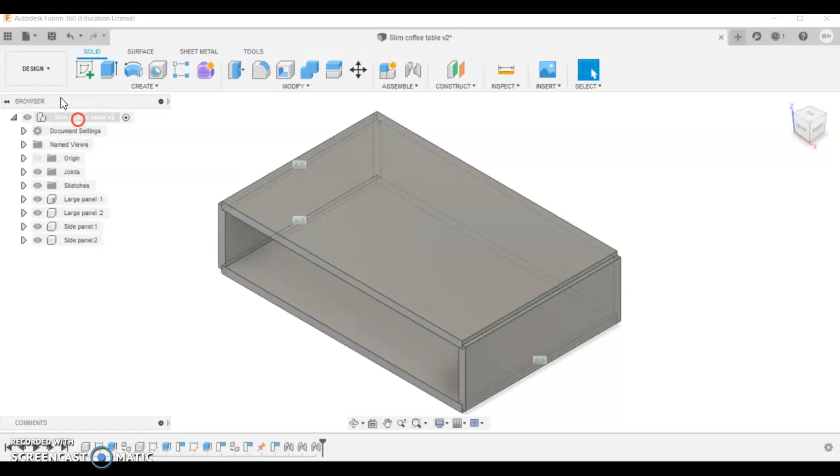Before I start a new sketch, I want to create a new component. The new component will come up in the list there in our feature tree, and we're going to call this one corner strip. Just make sure you get your naming right, because if you don't name your components correctly here, we can change it, but it's a bit of work later.

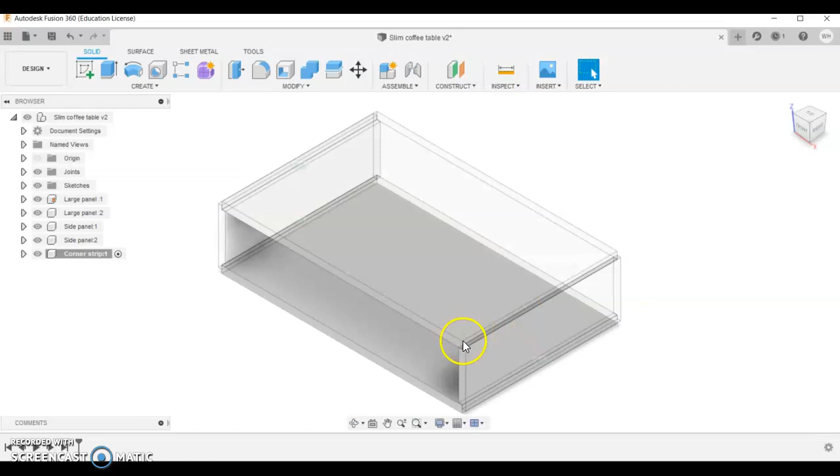So it's appeared down here. It's activated with a little bullet point there. I've already measured this, so we'll see if we can measure it now. Inspect, we'll zoom right in on this, and click this point here to this point here. It's 8.5 millimeters. I know it's already 8.5 millimeters from here to here as well.

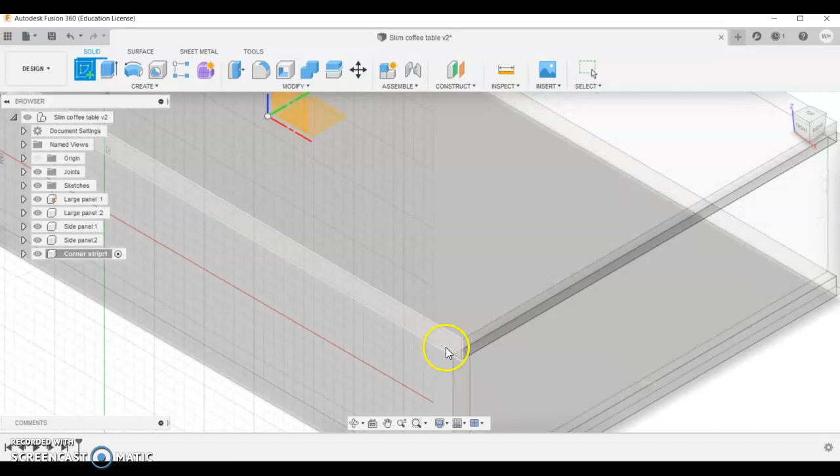So we need to start with a sketch. We'll click the sketch button. You can either draw it in context by selecting one of these pieces, but what I'm going to do is select up here, if it will allow me to select it. That's not the surface I wanted, so I'll start again. I don't have a mouse tonight when I'm doing this video, so it's a bit awkward to move around.

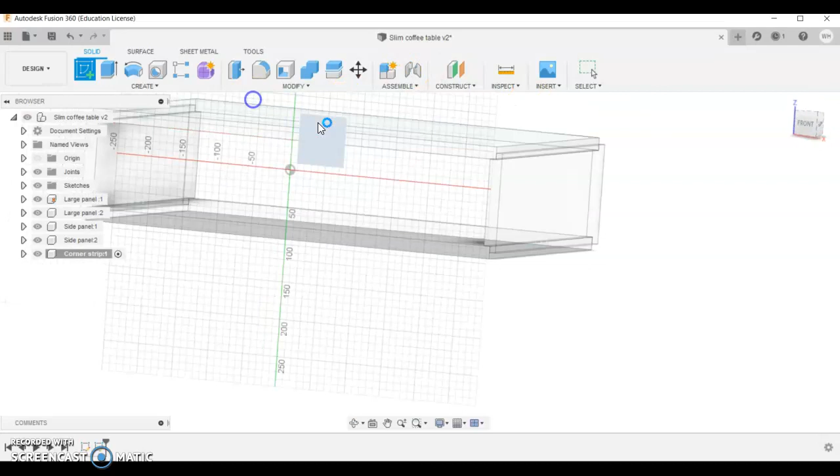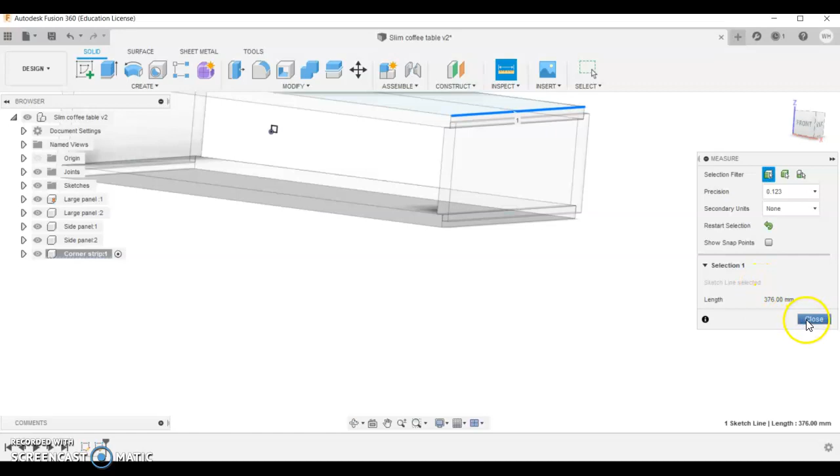So I've just started that. So it's an 8.5 by 8.5, so 8.5, tab 8.5, enter, finish the sketch. We're going to measure the length of the material. It's 376 millimeters. So extrude, and extrude that

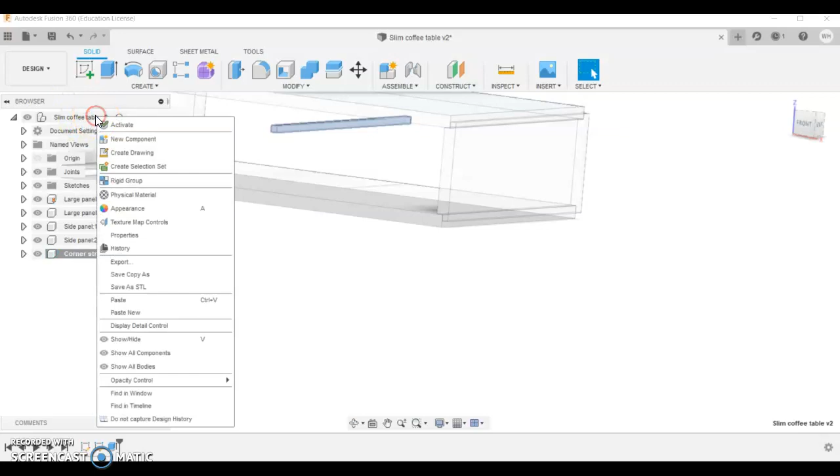376 millimeters. Press enter, and now what we can do is we can duplicate that component. So we're going to copy it by right-clicking and copy, and then up to the slim coffee table main part or the parent part, and we're going to go paste.

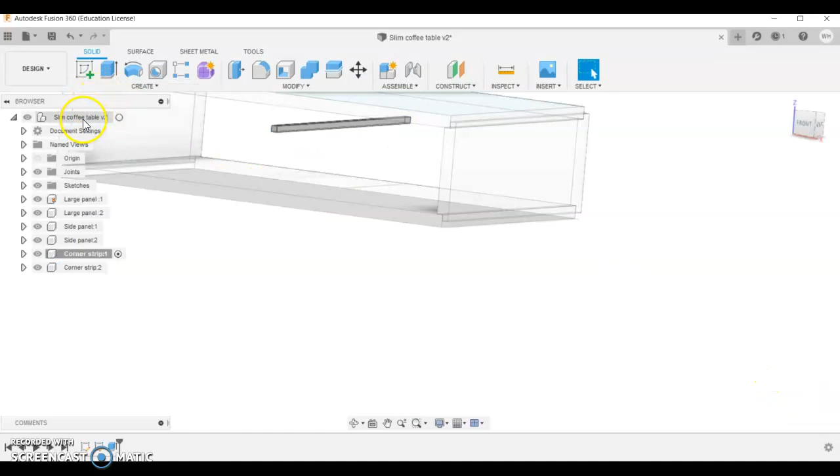This time we're not going to paste new, we're just going to paste, because a paste new would duplicate the component with a new name and the ability to change the component. We don't need to change this one, so we're just going to paste it. So you can do that. So there's 4 of them.

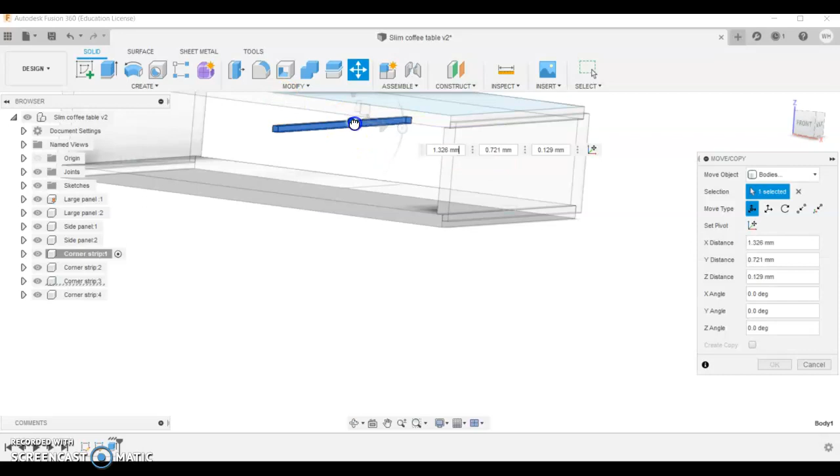Once you've got 4 of them, you can use the move tool to just gently move them around. That's 4 of them at once. So if you click select components, so that's those 2, and then we'll move that one out. I'm not too concerned where I'm putting these, final position is very difficult with a mouse, sorry.

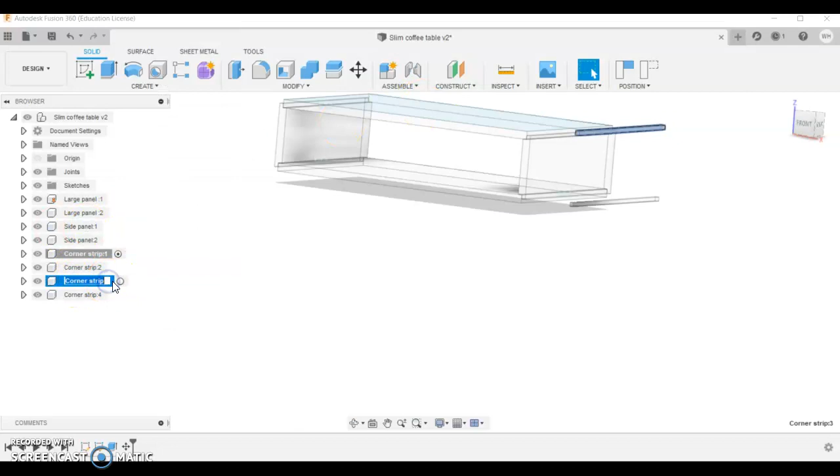I'll select it with that bullet point there, might be the problem. Sometimes it takes a few goes. Now I've got it. And the last one should be on this one here. Select the bullet point. And drop that one down as well.

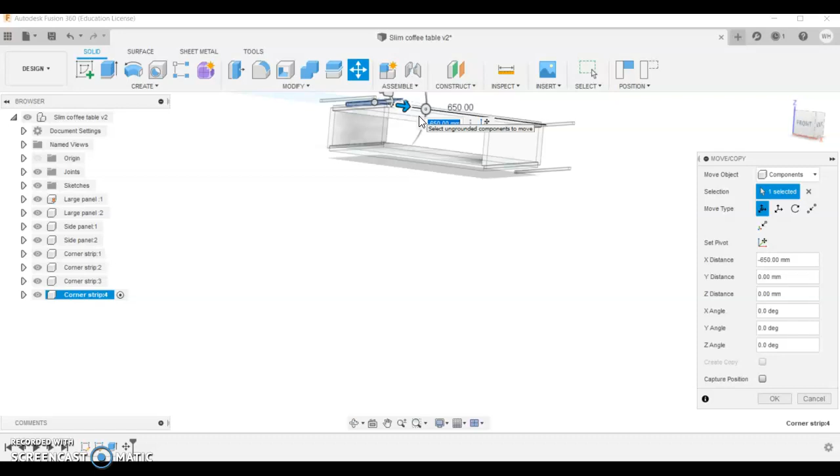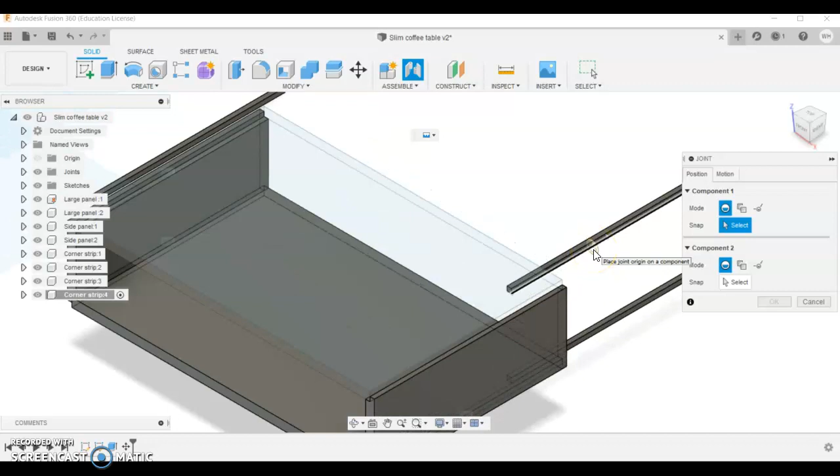Okay, so the next point is to constrain them in the right position. So I'm going to zoom in slightly. There's lots of different ways we can do this, but I think the way I'll do it is zooming right in, and select that inside surface, just there, and we'll zoom back out. And select the same point on that top surface there.

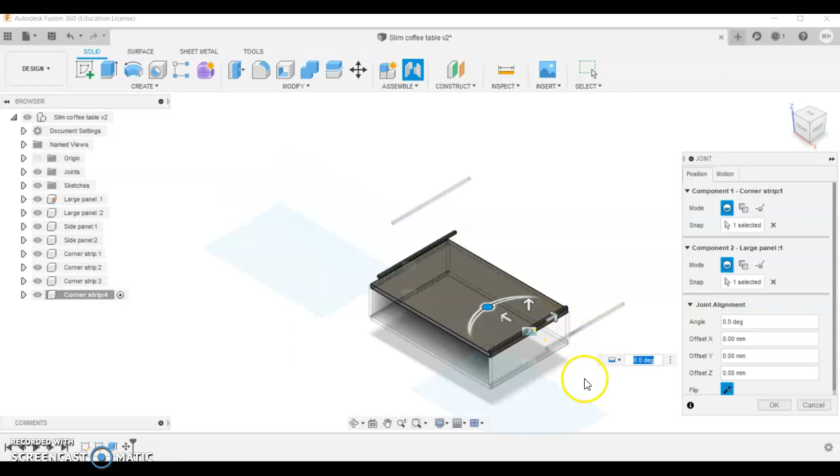You can see it's flipped or inverted there. So if I choose to flip the button down here, it should flip back onto the side we want it. Let's have a closer look at that. So that's sitting in a position where we want it now, so I'll click OK.

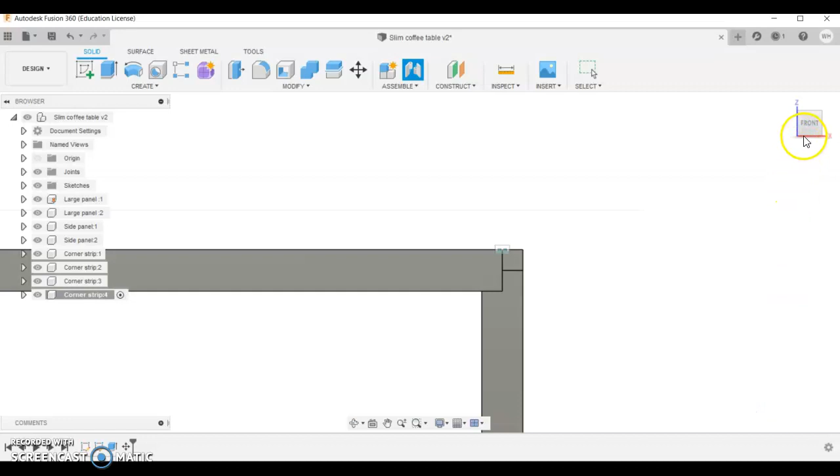I'll go through and do all of them. If you're happy with that, you can continue to do it yourself. Otherwise, you can keep watching this video, and I'll just finish that off. The next video will show you how to start creating the front and the back edging. So if you're good with the assembly, you can skip to the next video. Thank you.

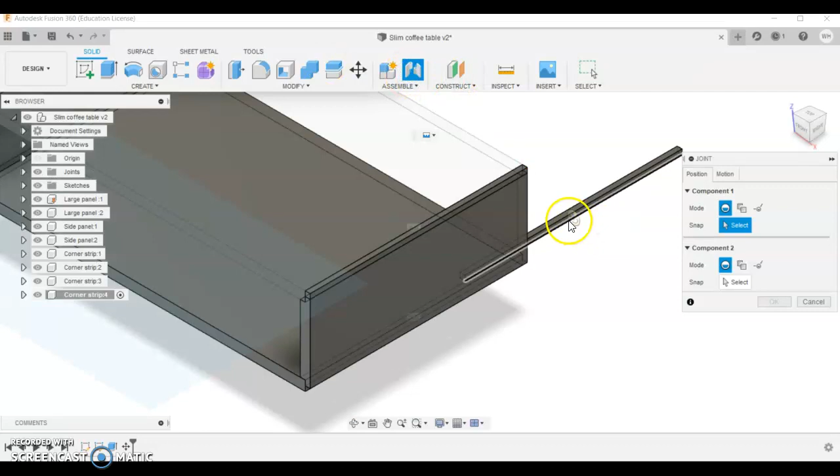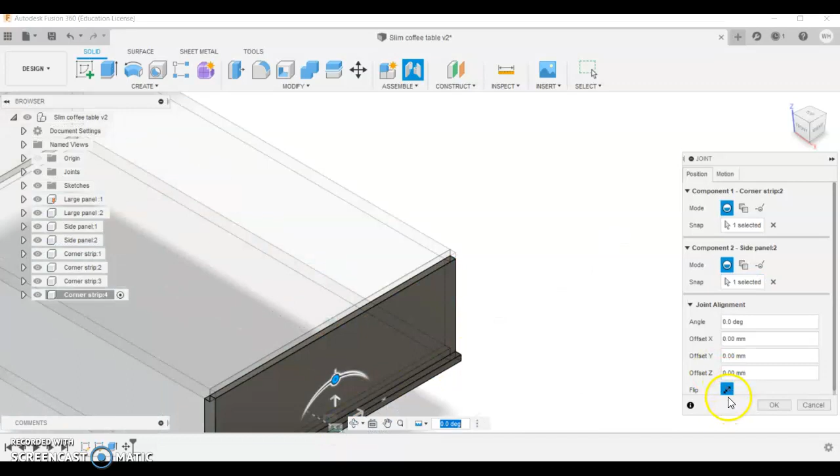There's multiple ways you can do this, different points to select. Looks like I'm going to press that flip button each time. Go around and we'll do these other two. You can see they're sitting well away at the moment. So always zoom in, using the mouse roller button, it's a lot quicker.

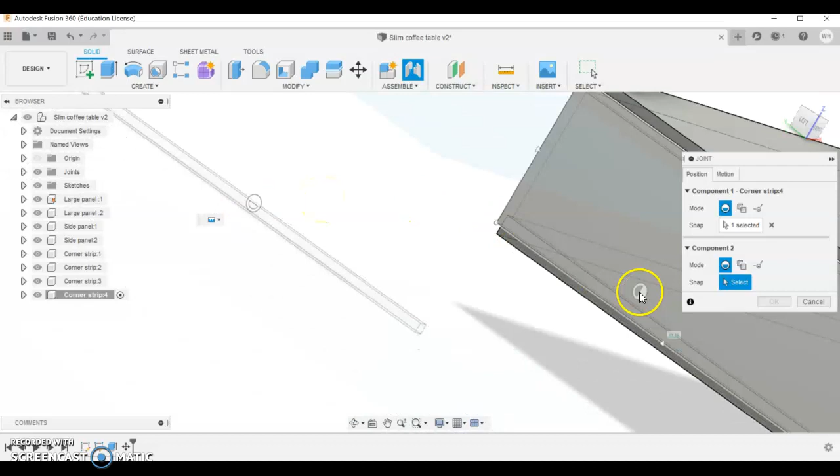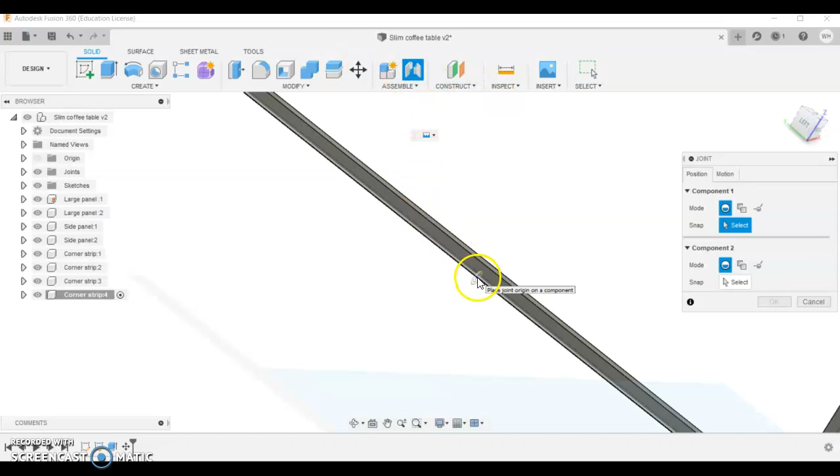That one again. And the final one. It won't matter if you did top surface or the side surface, as long as you get that joint marker in, using center is always easier. Zoom it in. We don't want the center, we want this edge. We don't want the axis, we want the surface.

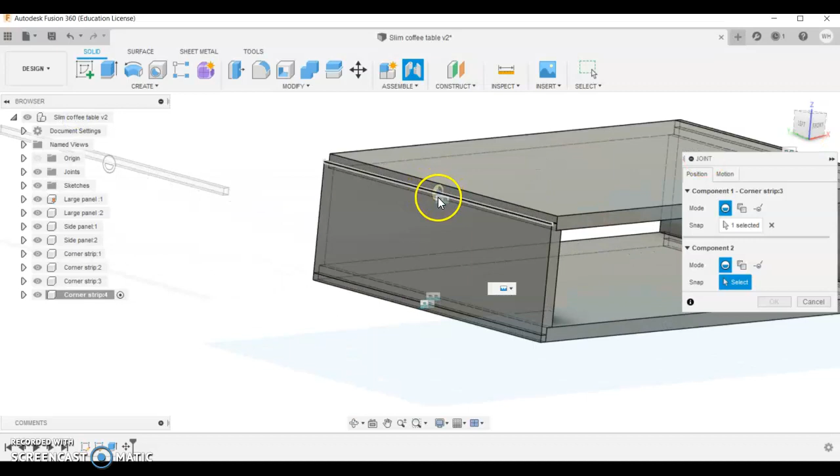And zoom out again. And then the corresponding surface here. Flip it and click OK. We'll check the home view. You can put the bullet point back up on here just to activate our whole surface. And for now, our project is looking pretty good.